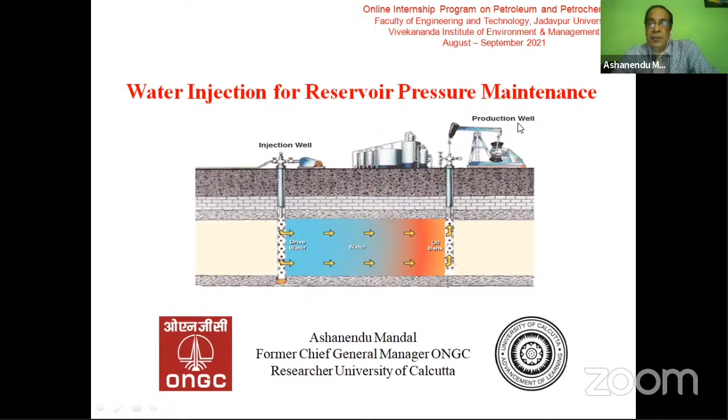On Friday, we discussed basically two aspects: oil and gas basics, meaning how we can find oil and gas under the earth and how we produce them. We had also concentrated on deep water. Now today, what we have learned is this part, the right side part: this is the well, this is the bottom, and this is the production coming from the rock, and this is coming out. This part we have learned. Now we will be learning this part, and the total explanation will happen.

First we'll introduce the topic, then we'll clarify why the pressure falls in a reservoir, and if it falls, what are the impacts, what problems we face, and then is it really required to do pressure maintenance. If it is, then how to achieve pressure maintenance, and whether only water can be used or some other things also can be injected. We'll emphasize on why water, as in our topic, and have a detailed description of water injection. As a case study we'll talk about offshore water injection, and finally conclude.

The water injection method used in oil production is where water is injected back into the reservoir to increase the formation pressure and stimulate production. Along with the production we get water, but we'll have to put that water back into the reservoir, where gas, oil and water remains, so that it stimulates the production and increases the pressure.

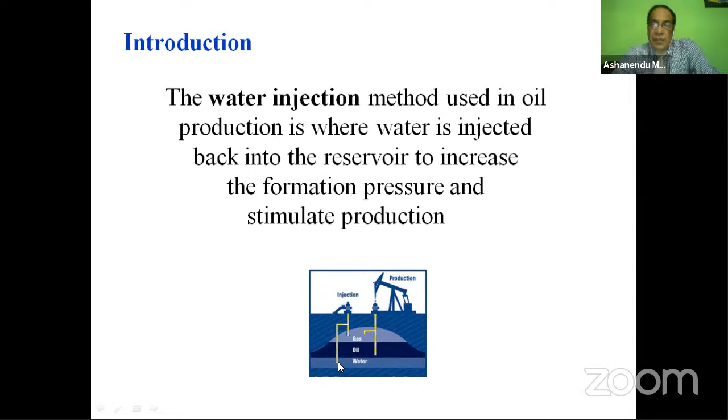Why does the pressure fall actually? It falls because the reservoir is covered by cap rock, which is impermeable rock, meaning nothing can go out of this. Whatever is there inside this formation cannot go out. So if that cap rock contains this much oil, this much gas, this much water, and some quantity is taken through the well, the availability of that quantity gets reduced. Obviously, the pressure will then go down.

The petroleum reservoir, or oil and gas reservoir, is a subsurface pool of hydrocarbons contained in a porous and fractured rock formation, and reservoir pressure falls due to withdrawal of fluid and creation of void space. So as voidage gets created, that's why the pressure falls.

Now what happens if the pressure falls? First of all, the driving force will go down. In this production scenario, production comes to the top because of the pressure gradient - this is the formation pressure and this is the well's hydrostatic head. As the hydrostatic head pressure is less than the formation pressure, it comes inside. So now the driving force will go down, and obviously if the driving force goes down, the production will go down. Oil production decreases with time because of more and more production coming out from the same reservoir.

And when this happens, the liquid which contains the gas absorbed in it gets dissociated or evolved out. So the gas quantum will go up - this is called GOR, gas oil ratio. So gas quantum increases while oil production goes down from any reservoir with time.

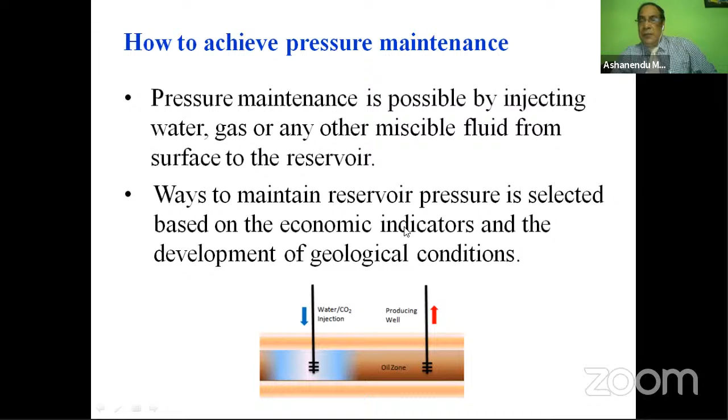Why water for injection? Because it is cheapest, that we can understand. Even CO2 is maybe freely available from flue gas, but to get it transported to the locations and other processing requirement for making it 99% CO2 or so, that will definitely be a costly scenario. So abundance, of course, water is very much available everywhere.

Coexistence with crude oil in reservoir is another important part technically, because any oil well contains some water. So if this water gets mixed with that, it automatically gets compatible. That way it has the good property to take care of the displacement of oil, and it's largely compatible. Less treatment is required to make it compatible and injectionable.

We'll definitely discuss the treatment facility and steps to be followed. We'll find that treatment procedures are very simple, not complicated, and have less problem in disposal while returning from the reservoir. If that water comes back along with production, we can easily dispose of it, either by re-injecting into the well, or after treatment disposing it on the surface. Water has a tendency to enter even the smallest pore of the rock, and hence is very effective to displace oil from there. This is another technical benefit of water.

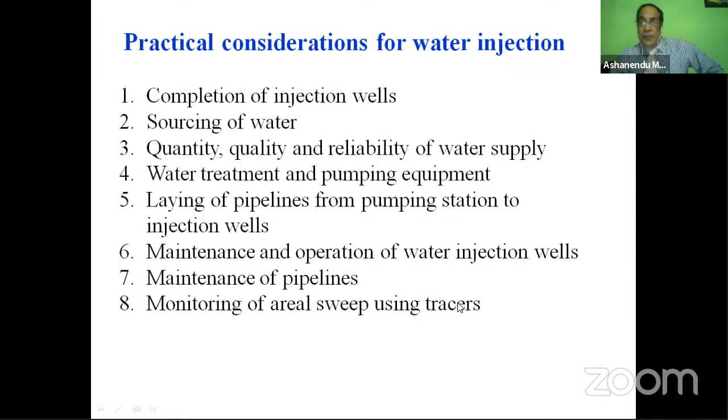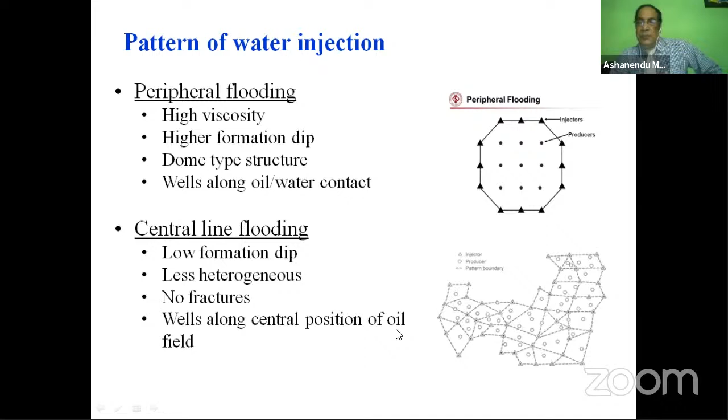Now, in case of pattern flooding, again there are few types. One is called line pattern, meaning the injection wells and producer wells are in the same single line. Otherwise there is 5-spot pattern, 7-spot pattern, 9-spot pattern, and 4-spot pattern.

So practically, what we find in the reservoir after drilling is that there is a well which is an oil producer, and there are many water injection wells surrounding that oil well. In that way, the movement of oil and water will take place at the bottom.

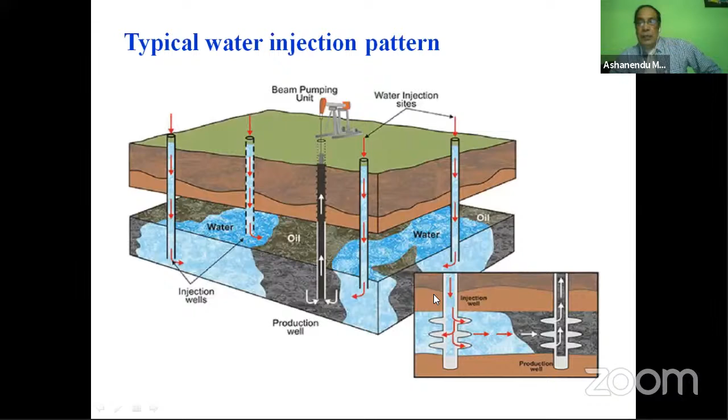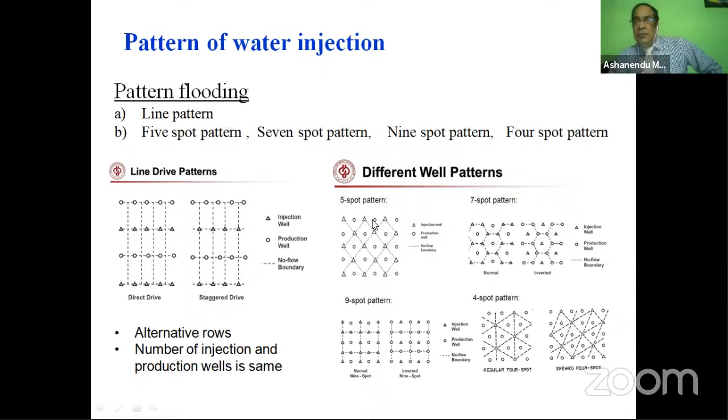And what is the ratio of injection to production wells in case of each sort of pattern? For line pattern, it is 1:1. For 5-spot, it is also 1:1. Although I said 1 is surrounded by 4 in the 5-spot, if you take a bigger area considering overlapping combinations, you will find that the number of injection wells and number of oil production wells are the same, that is 1:1. In the same fashion, the ratio for 7-spot is 2:1, 9-spot is 3:1, and 4-spot is 2:1.

This pattern matters because if we start water injection very late, meaning after removal of a lot of oil, water and gas from the oil well, there is more voidage already created, so we will need a higher injection rate at that time. So then we will have to go for 7-spot or 9-spot, because that will allow more water injection compared to the oil production.

And they are all internal characteristics basically. The flooding pattern influences areal sweep - areal meaning horizontal and vertical, area-wise you can say - that is the sweeping efficiency. Sweeping means just to push the oil by water, considering mobility ratio, that oil also moves and water also moves, their mobility ratio and pressure distribution.

These things happen because of these combinations, and ultimately it will give the benefit or it will have bad impacts also. In other words, the desired oil production rate, proper water injection, maximization of oil recovery, and taking advantage of known reservoir heterogeneity - all those things basically. There are many criteria, but we will not go into details.

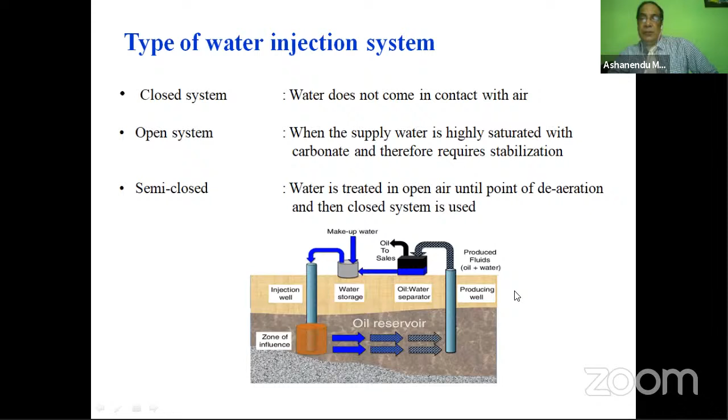As I said, this injection water needs treatment because it should avoid plugging, meaning the choke should not be plugged. It should avoid corrosion of the pipings, because if the pipings are corroded, then rust and other materials will also choke the bottom side, other than causing leakage from the tubing. And it should avoid swelling of clays, meaning clay swelling should not happen. These are the processes which happen in the reservoir, so we will have to treat the water before injection to take care of these aspects.

And plugging, in case it happens, suppose this is the plugging if it happens. So what is happening? The passage is choked. So that's why we will have to avoid it. And who causes plugging? Suspended solids, as I said, corrosion and bacteria, precipitation due to incompatibility of waters, or even from scaling materials.

This is the corrosion. You see the pipeline inside can be corroded in case the water has CO2, H2S, or dissolved oxygen also. So these are the things we need to remove before the water is put into the system.

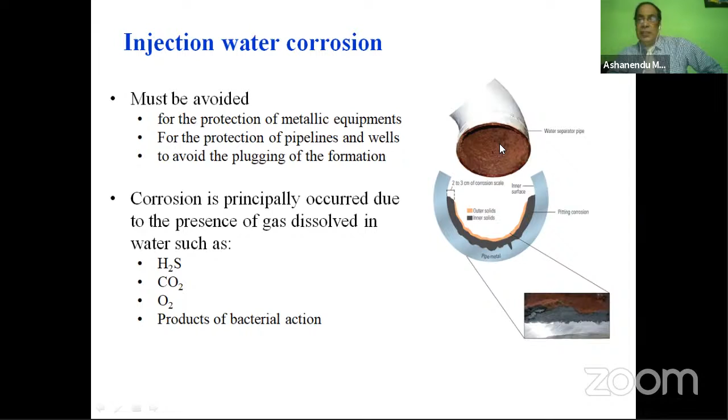Otherwise, these corrosions can take place, and finally they can also choke the pores. And swelling of clays, as we explained, in case that fresh water or water which is conducive for creating the swelling of the clay or the clay materials, that needs to be treated. Because swelling results in reduction of rock permeability, because if it swelled, then definitely the permeability will get reduced. So the best treatment for this is injection of HCl into formation for several hours before the start of water injection.

In case we find that this fresh water is conducive for swelling, then what we should do? We should put some HCl, hydrochloric acid, and close the well for some days. Then they will be seasoned up, so that any fresh water which otherwise could have created the swelling, that will not happen.

So as we have to take care of these aspects, what are the intentions of the processing? One is called sedimentation, meaning to settle out the sediments, whatever suspended solids are there, that needs to be sedimented and then filtered out. Then remove the dissolved gases, the gases which will create problems from the corrosion point of view, they should be removed.

And we should do the chemical treatment also, for scaling, for swelling and other things. So we will be using HCl, and at the same time we will use some specialized chemicals which will take care of the impact of bacteria growth, the impact of corrosion, and the impact of scaling. So we'll have the chemical treatment also.

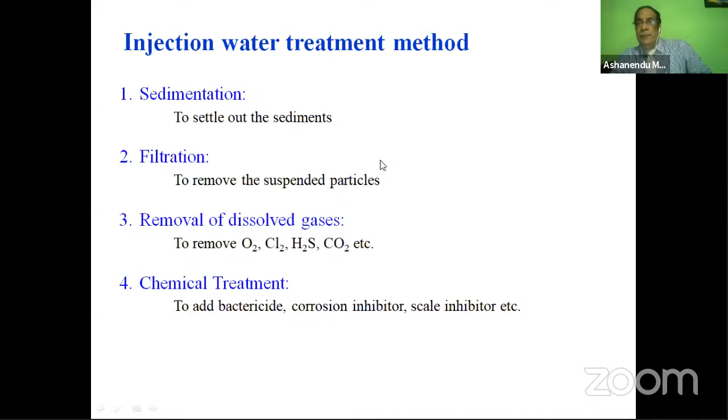So we'll have to calculate that voidage quantum, and accordingly estimate the quantity of water. Care must be taken to prevent loss of water due to failure of cement bonding. So in any well, there is cement bonding on the external surface of the tubing, to provide rigidity of the piping. There is a possibility that water can go through that leakage of the cement, that cementing failure. So that is also to be seen. The cement bonding failure, whether it can create loss of water, is also to be understood for estimating the water quantity.

Water requirement is also influenced by rate of injectivity, that is change in injection pattern. As we said, there are injection patterns which we have to identify in the beginning itself. Now if we would like to change the pattern, the well depth, the time gap and all those things, they are also equally important for calculating the injection water. So injection water quantity, although known in the beginning itself, needs to be re-evaluated or re-estimated from time to time.

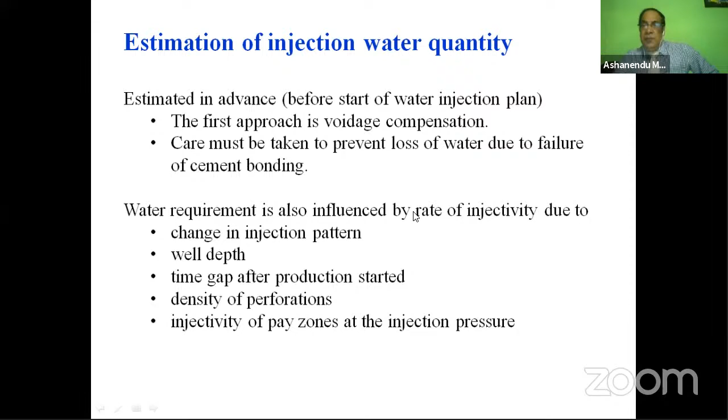And once we have understood how much quantity of water is to be injected, we'll have to go for drilling of a new well, which will be known as the water injection well. The water injection well and oil production well procedure is exactly the same. It's not that different procedures are there. All the casings, the annulus, the tubings, everything is similar, and even the perforation also is similar.

Only the layer will be a little different for perforation and for production. The production will be from the oil and water interface, but the water injection will be exclusively in the water layer. So it is a little further deeper than the oil well in that particular field. It's not that everywhere the depth is changing in the same way, but for this field where the oil well is, we will have to consider around 2 to 3 meters below that oil zone for this perforation to be done.

The new initial completion will happen through drilling of a new water injection well and conversion of an existing well. Sometimes the production well which is not producing much, because the quantum has reduced to very little quantity, can be converted into a water injection well. As everything is similar, there won't be any problem getting it converted.

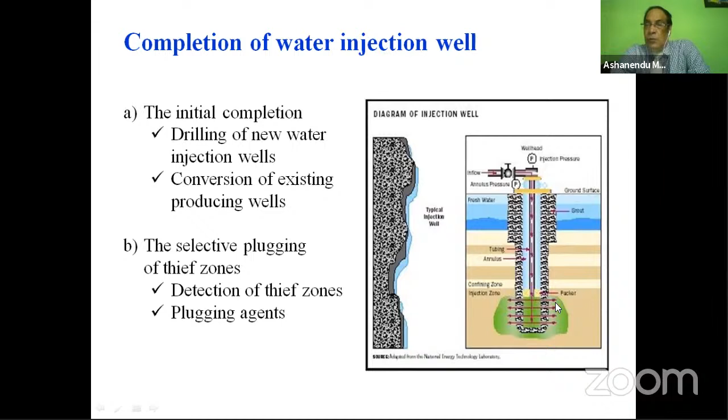We can plug them also. If we can detect them, then we'll be able to put some fluids or muds that can ultimately close or plug those thief zones.

In case we go for a new water injection well, it is exactly similar, as I said. It will not be required to convert any producing oil well. It will be drilled newly from top to bottom.

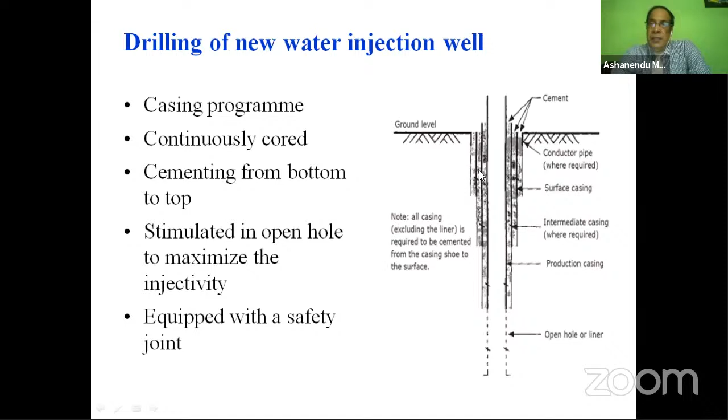This is what is happening, as I explained, regarding how the perforation and other things will be taken care of. In case the tubing which was initially lowered for oil production is now utilized for water injection, we may have to change the tubing. In case the same tubing is okay for water injection also, then it is not required.

Otherwise, this is called pulling out of production completion, meaning whatever production pipings are there will be pulled out, and then running in of new water injection equipment, with other things more or less similar to earlier.

This is the detection of thief zones. As we are saying, thief zones may happen inside the formation as a failure. There are some equipment or instruments available to identify the thief zone.

One is called continuous flow meter, meaning if we follow the quantum and find sudden ingress or outgress, we can understand there are certain thief zones. But if it goes smoothly at the same rate, then it will not be there. So continuous flow meter will be used for logging the thief zone.

Otherwise, some tracer can also be put. We can put a tracer, and in case that tracer does not come back, that means there are thief zones. But in case it comes back, then thief zones are not there.

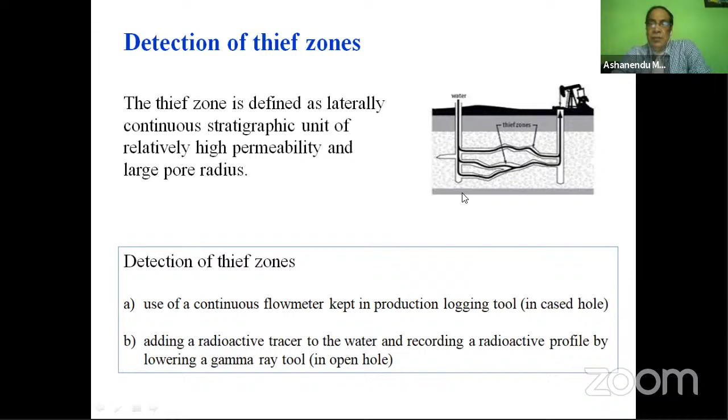For plugging of thief zones, what we use basically: talc, zinc oxide, cement, colloid, resin. These are the materials which can be used for plugging the thief zones.

Agents are injected in the form of particles. Particles travel until trapped in front of the pore. The following particles will then back up behind it, and the formation will become plugged. The effect can be accentuated if a swelling material is used.

In case unplugging is required, the precipitates may be dissolved by HCl. So these materials are utilized in a particular procedure, and in that way these thief zones can be blocked. In case we feel they need to be reopened, we can inject hydrochloric acid, which will melt or dissolve these materials used for plugging the thief zones.

And preparation of the injection well. In case the injection well has been drilled newly or converted from a production well, and the thief zones have also been plugged, now...

What we do basically when we go for an injection well: sometimes we take some production from that well itself, since injection wells and production wells are exactly similar. So in the beginning, before injection, we can take some production from that injection well also.

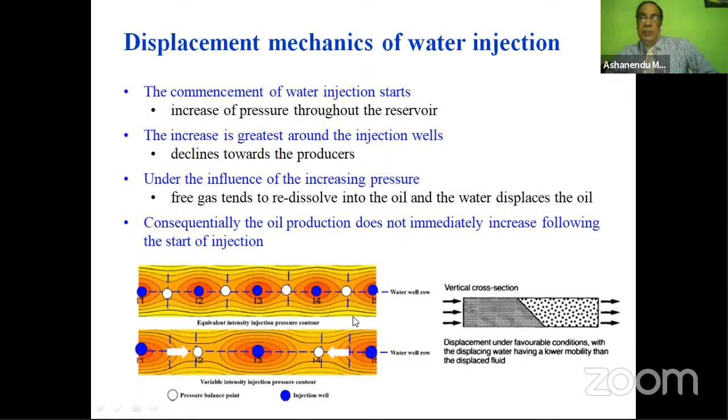Whatever is there gets displaced and comes to the producing well. So commencement of water injection starts increase of pressure. One is the pressure increase in the reservoir, second is around the injection wells, displacement also will take place. So these are the two benefits we get from water injection. These steps are all shown, but we will not go into details, just simply stepwise how these movements are taking place in the formation.

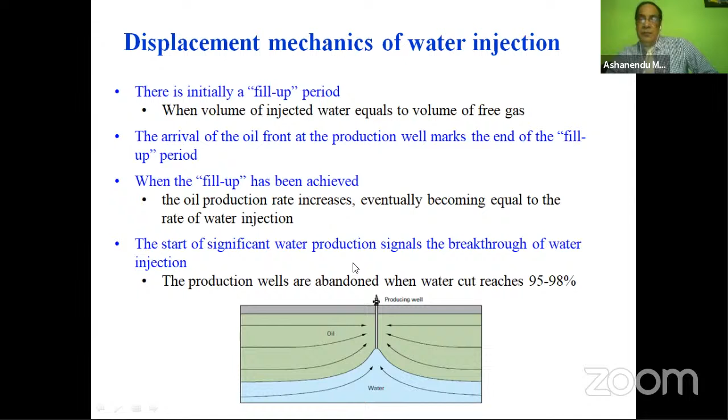Now we'll go for a case study, basically a case study for offshore water injection. In case we go for water injection offshore, definitely the source of water will be seawater. We can take water which is coming along with the wells also, but they need to be collected from a single location, because in offshore, as we explained earlier, the oil processing platform does not have big vessels to store either oil or water, etc. They are small in size and taking place continuously. But if we have to go for water injection, we'll have to collect them at gathering locations, and that is not possible. So that's why we prefer to use seawater.

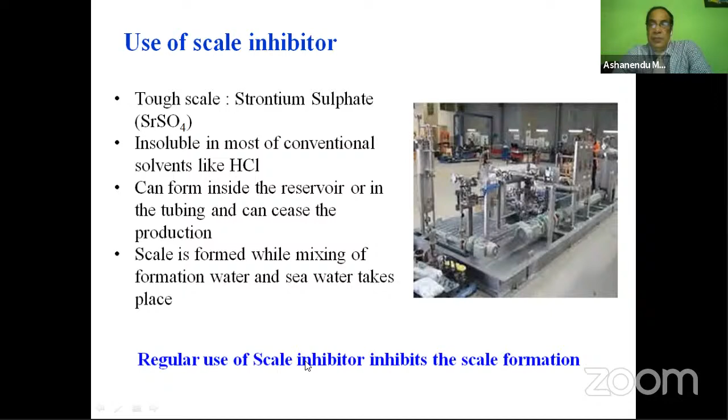Then drag reducing agent. The water has to move inside the formation very easily. There should not be drag force which creates a problem for water to flow inside. So we should use some chemical to reduce the drag - surfactant or soap type solutions can be utilized, which are effective for reducing the drag force. Use of drag reducing agent increases the pumping rate. As the drag force is reduced, we get more pumping, and if more pumping is there, fewer injections will be needed, energy consumption will be less, and corrosion chances also will be less. So there are many benefits from using drag reducing agents.

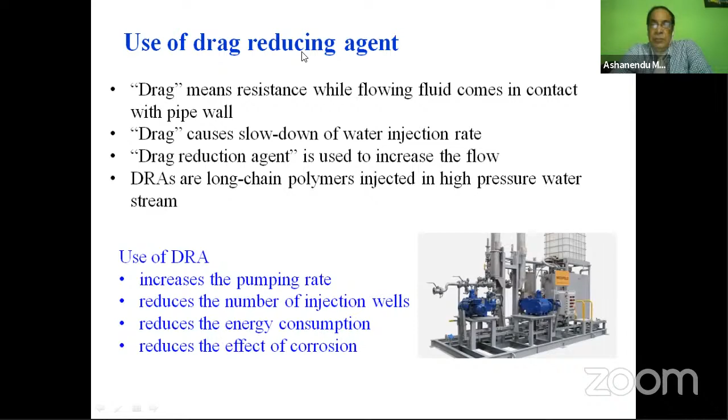We need to monitor corrosion also before going for corrosion prevention through corrosion inhibitors. One is iron count monitoring, where spectrophotometric and direct reading can be utilized. Weight loss coupon - we use metallic coupons and take the erosion or reduced coupon weight, and the loss of weight signals corrosion taking place. Or corrosion probes - directly we can use probes, and through instrument you can measure in mils per year, that is millinch per annum. This is the admissible rate, and it has to be less than that. Regular dosing of corrosion inhibitor prevents corrosion formation.

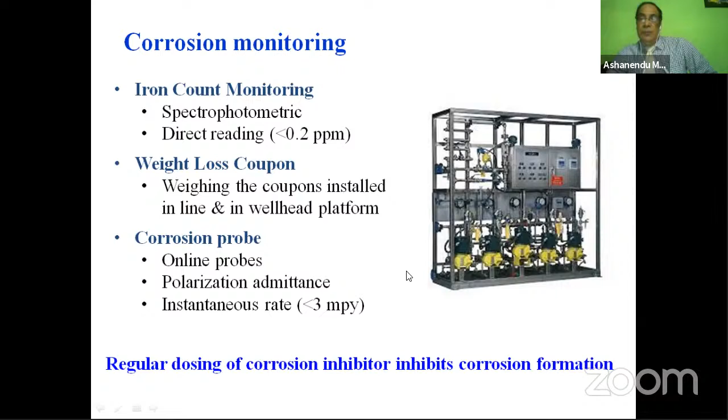And then finally we should go for maintenance of the water injection system. Once we have installed everything - the water injection wells, the processing of water injection - finally we need to maintain the total system. What are the things to look into? Water quality control physically, chemically, and biologically, corrosion control, regular inspection of surface equipment, whether any pipeline leakage is there or any leakage from the flanges, whether the valves are being operated properly, and in case of real emergency, whether the valves can rotate freely or not.

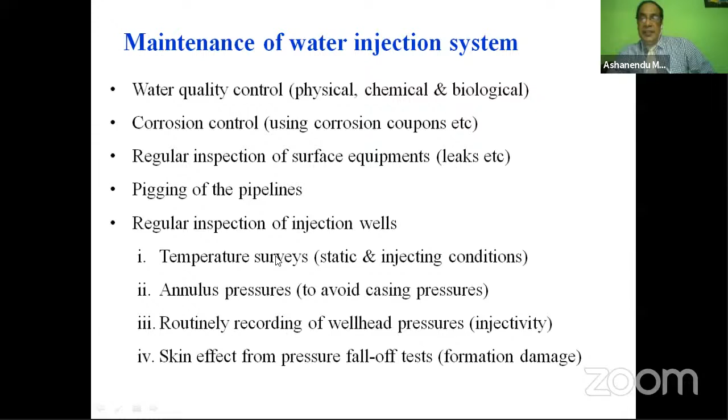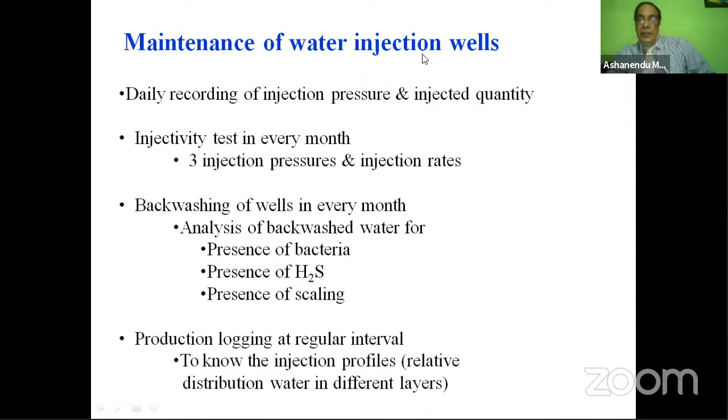Daily recording of injection pressure and injected quantity, injectivity test every month, backwashing, and production logging. So these things need to be monitored from time to time.

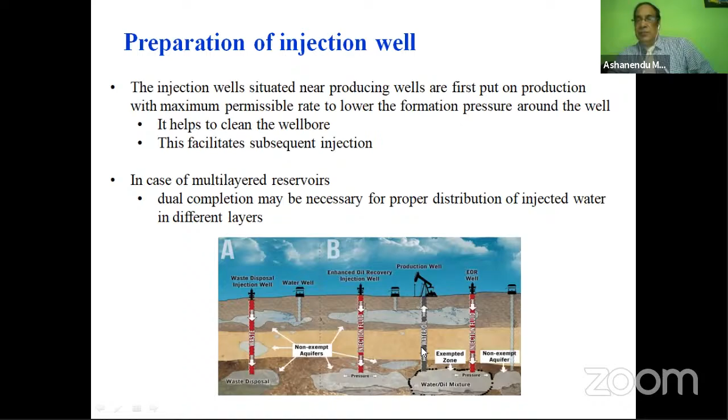So if we put the tracer and get it from here, that means no more water injection is required, because whatever water is put will straight away come from this well. So if the tracer comes, we get the signal that water injection is not to be continued.

So this tracer is for knowing the sweeping efficiency, to detect the breakthrough of water from the injection well. The tracer materials are formaldehyde, thiocyanate, nitrates, dichromate, iodides, etc. Dosing is at 1000 ppm and duration is around 2 days.

Tracers are used to track the frontal advance of water. Tracer arrival times from injection wells to producer wells help determine the sweeping efficiency. So if they come very quickly, that means water breakthrough has happened, and we should not continue water injection from that location.

So finally, if we do not do water injection, the pressure will go down, and for primary recovery, whatever original oil in place is available in a reservoir, we can get only 15 to 30% with natural energy, without water injection. But if we go for water injection or pressure maintenance by any other means, we will be able to increase this recovery factor from 15-30% to 40-45%. So a lot of gain will be there by maintaining the pressure through water injection.

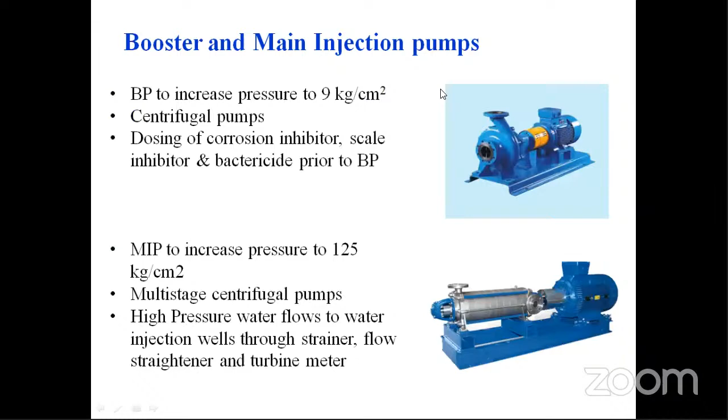And secondly, they required some modification in that also, the way we did it. What happened in the fine filtration system, for example, we found that a lot of anthracite loss is there. Anthracite is very costly, first of all, and not only from a money point of view, but to get it offshore, because offshore, as you know, there is not much space available for storing all those things.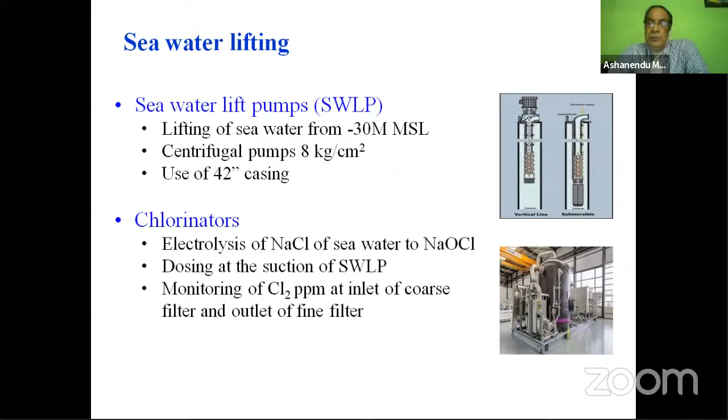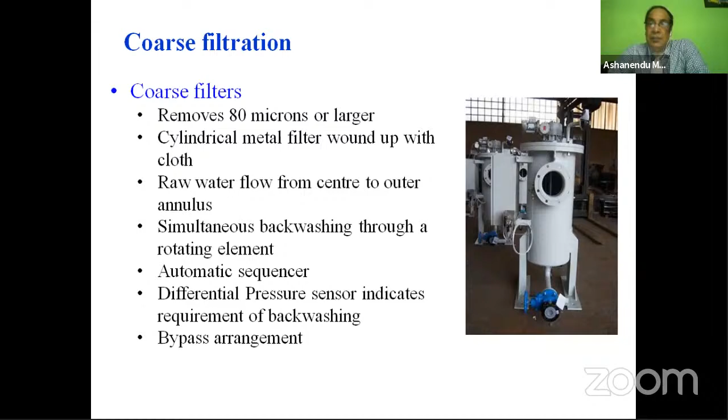So like that, there are many such instances - we are talking about a few. At every step, basically, we had to do some internal modification in operation, because in construction we cannot go for modification. In operation we can, and those things have basically influenced better results, and those are being followed now also. So this is what happens basically.

Sir, okay, I have a question apart from this. Yeah, go ahead. Sir, in offshore platforms, is there any high power eyesight cutoff to work there? No, only medical health is required. Sir, I have a high power of minus 4.5, so eyesight-wise, can I work? Yeah, eyesight so far - of course, we have a doctor on board also. He will monitor whether your movements are problematic or not. In case through lens you are able to manage like normal, then there is no objection.

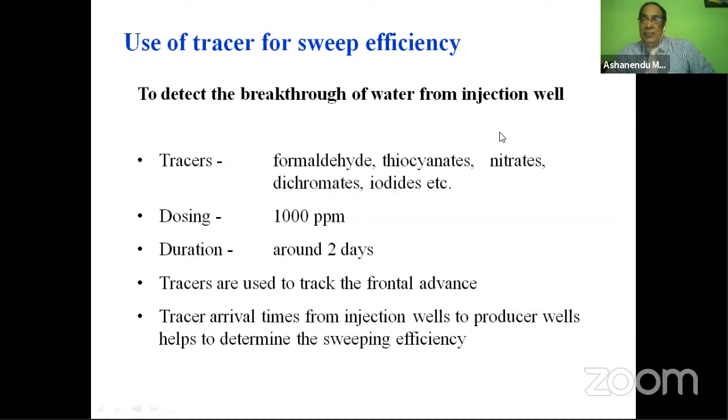I do not believe it myself. In fact, I had sought medical help to try not to continue working offshore, because I was so thin at that time, only 42 kilos, and operating with helicopters, and I was posting men at the location. So a lot of helicopter movements were there, even boat landing operations also - we had to do jumping and all those things, everything we have done actually. So I was obviously scared also. I told the doctor that this place is not suitable, but the doctor just examined me and said no, you are medically fit. So that could not be useful. So there is no problem as such, as long as you are healthy.

Okay sir, then I can work, right? Yeah, I do not find any criteria made for eyesight. Sir, usually what are the working hours for an engineer offshore? 12 hours a day. And sir, is it possible to return on the same day? No, because we have to sustain there. You will have to remain there for 14 or 21 days - in some places 21 days, in some places 28 days, but in our ONGC, it is 14 days. So you have to stay there for 14 days, with accommodation also provided.

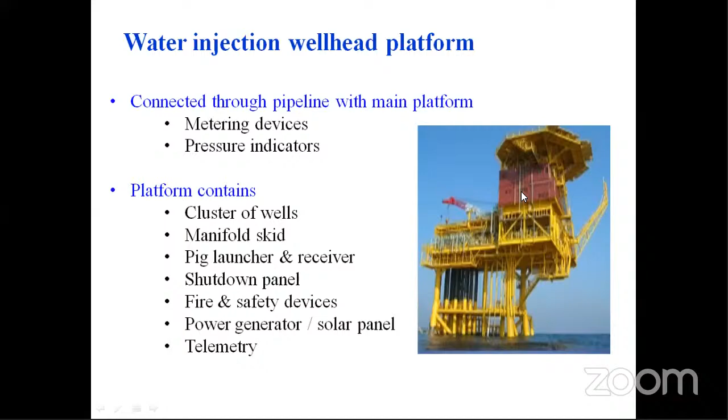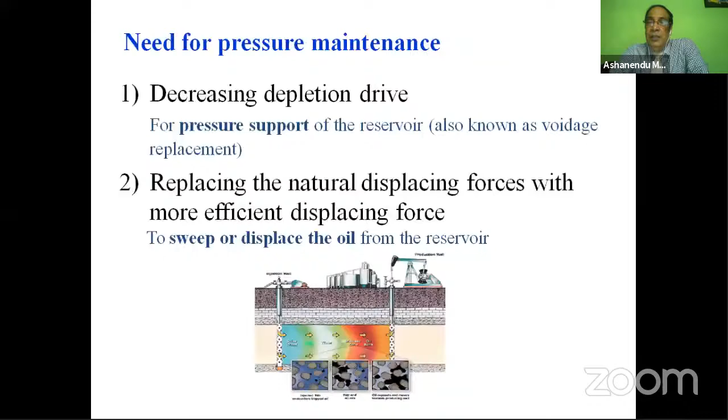Yeah, these are all accommodation. I say this is the platform. You are to remain within this area, and not you only—almost 150 to 300 people, sometimes it goes up to 300 also, depending on contract labor. Otherwise, 150 is the normal capacity, so many people are there, and bunkhouse is there. Food is free; almost a 5-star arrangement is there inside the living quarter.

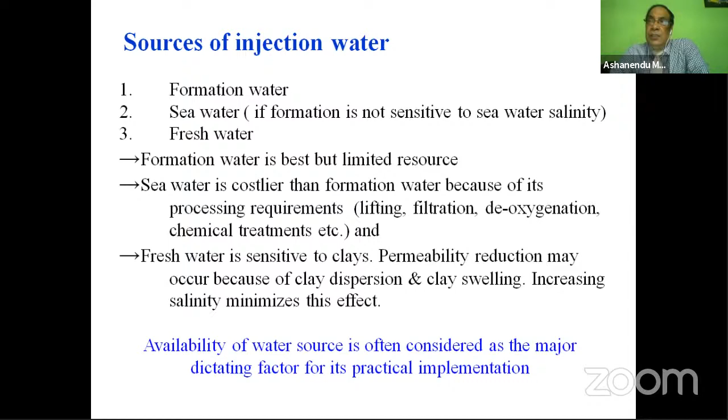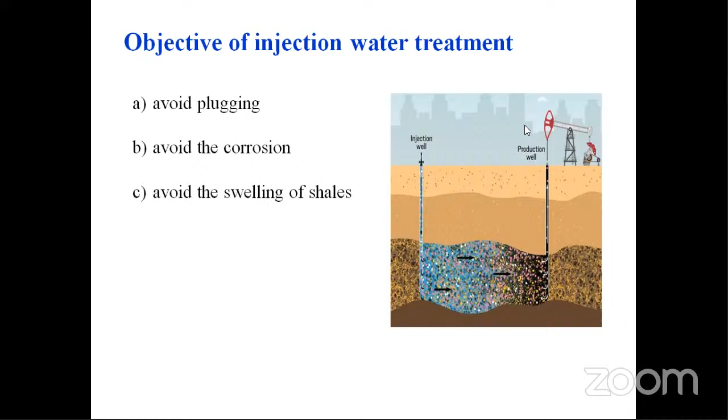So can anyone sleep without any hesitation? Can one sleep properly? Yeah, because living quarters are totally soundless. Even at your home you may get some external sound, but there you won't get anything. They are two layered actually—all the doors have two layers, and a pressurized chamber is there. The pressure inside is a little more, very less actually, but so that outside thrust of air will not come inside, or any smoke or pollution, nothing will come inside.

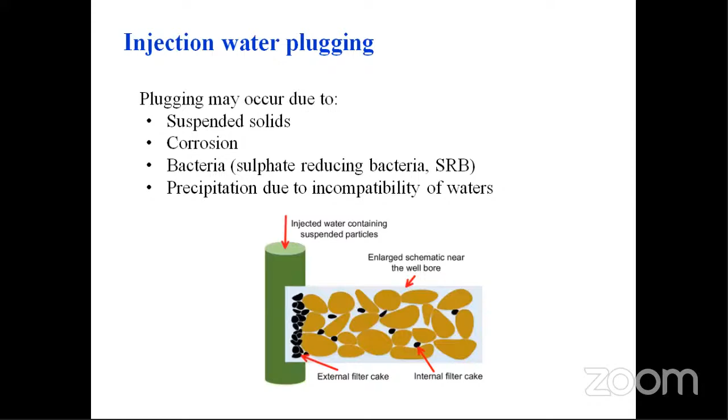And sir, if a cyclone comes—those we have already stayed there for so many years, and the platforms are there now also. That day I was explaining about deep water also, the drill ships and semi-submersible ships in the East Coast. Even the hurricane or wind speed is very high, even then, even in monsoon, people do stay there. There are very rare occasions where the places need to be evacuated. So they are all cyclone proof. There is no problem as such.

Sir, onshore or offshore, there is a constant fire, sir. What is that function, sir? Constant fire—no, that is called flare. Clear. Yeah, oh yes, flare, sir.

Actually, even in offshore we have the flare system. It is water injection, that's why the continuous flare is not there. But where the oil and gas processing is there, we have a flare, because the low pressure gas, very low pressure gas, cannot be recompressed and taken back into the mainstream. For example, suppose we have a separator which takes at 1 kg per centimeter square—that gas, if you have to compress, needs huge money to invest again. So those gases, or even wherever atmospheric stabilization is there, suppose in an open scenario the tank is being maintained, because the oil needs to be stabilized totally free from gas so that it can go to the tanker for transportation, because the tanker cannot take any gas along with the oil.

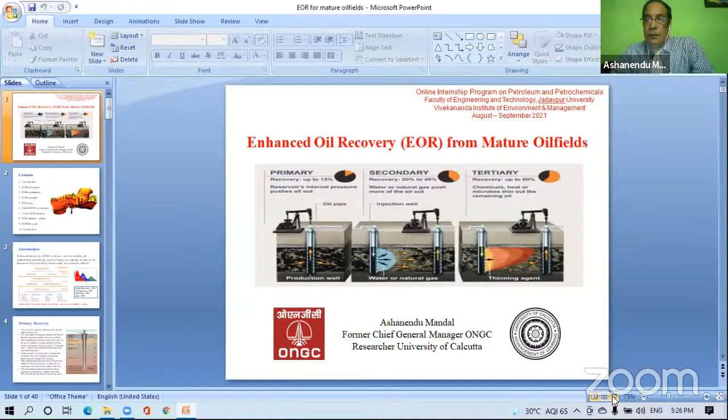Yes sir, what can you see? What is written? Sir, enhanced oil recovery from mature oil fields. And what is the meaning of that? So far, what can you understand from this?

The remains just the oil, sir, means the last portion of oil. How to extract it? In our earlier lecture we said 15 to 30% can go up to 40 to 45%, but still it is not touching 100%, because some oil is still left in the reservoir. So this is another step to go for more production from that location. That is called enhanced oil recovery from mature oil fields.

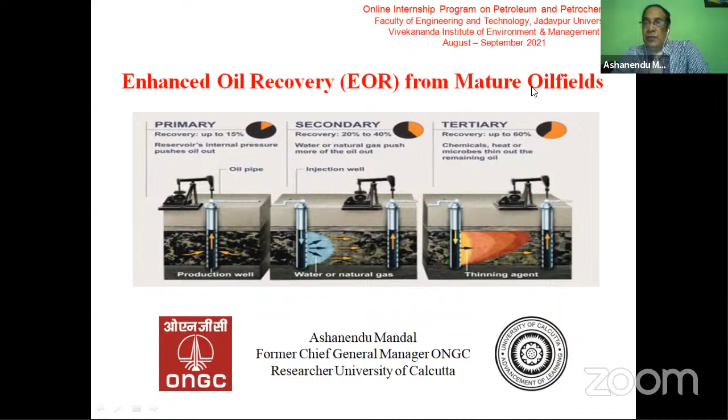So this picture is saying primary, secondary. We'll explain that, but we'll go through it very quickly now. I think many of the things are almost explained, so we'll not explain right now. When you get this presentation, you will understand them on your own also, so we need not explain in detail now.

Introduction, techniques of enhanced oil recovery, implications, principle, costs, global production, Indian scenario, selection criteria, life cycle, and conclusion. Enhanced oil recovery or tertiary recovery includes all methods that use an external source of energy or materials to recover oil that cannot be produced economically by conventional methods.

Whatever we have produced earlier by primary recovery used natural flow or artificial lift, such as sucker rod pump, submersible pump or gas lift, for primary recovery of production. Then we went for pressure maintenance or water flooding for secondary recovery. Now we are at tertiary recovery, and this can take the production above 50% and up to 80%, so you can estimate now up to 80% is possible to be recovered if we use this enhanced oil recovery.

World recovery average is now 22%, so the future is very bright from that perspective. USA recovery is 39% and India is 32%.

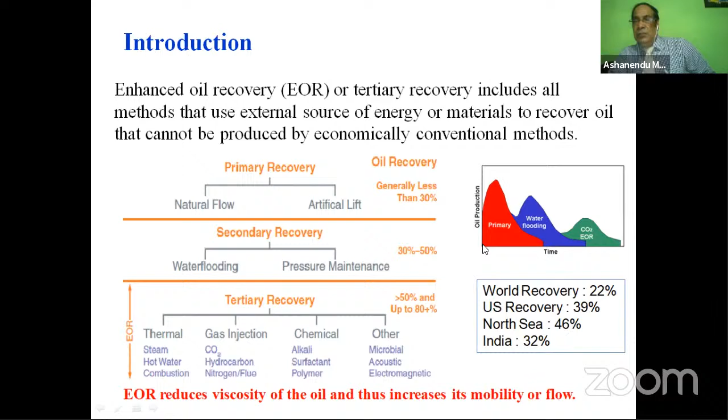In case of primary recovery, if water flooding and CO2 are not used, the production will stop here. But if we go for water flooding, then we can go up to here, and if we go for CO2, then we can go further. This way we can continuously take production for even longer time.

Primary recovery we had already explained, so we need not go into details, just we'll read it. The oil well is created by drilling a hole into the earth with an oil rig. Few steel pipe casings are placed in the hole to provide structural integrity in the new wellbore. Holes are then made in the base so that the oil is connected with the reservoir through the wellbore. Finally, a collection of valves called a Christmas tree is fitted to the top.

After that, there is a processing facility. It is necessary to connect the Christmas tree with the pipeline network for processing. If the underground pressure in the oil reservoir is sufficient, the pressure will force the oil to come to the surface. In case the pressure goes down, then we'll have to go for SRP, ESP or gas lift.

So when we go for this artificial lift, we are not doing anything in the reservoir. Whatever we are doing is up to the wellbore only. We have not done anything in the reservoir in case of primary recovery.

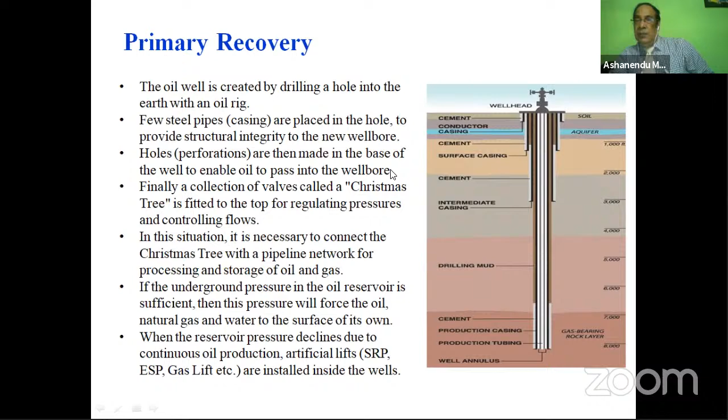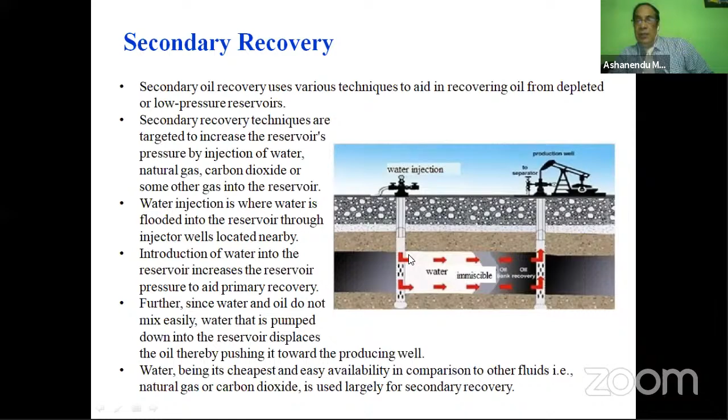Now we go for secondary recovery, which we are doing through water injection, as we explained. So here we have done something in the reservoir — we have increased the pressure. So we need to explain this now.

Tertiary recovery involves injection of different materials into mature oil fields or mature reservoirs to recover oil remaining after the primary and secondary recovery phases. The process of EOR can be classified into four major groups: thermal, chemical, miscible gas, and others like microbial. Try to remember these things — not essential right now, but at least by listening.

Thermal EOR uses thermal energy, meaning we have to increase the temperature of the reservoir. If we increase the temperature, the viscosity will get reduced. This part is to be understood: viscosity goes down if temperature increases. And if the viscosity is less, the mobility will be better because the resistance force and drag force will go down, so more easy flow will be there.

So this topic talks about using thermal energy to increase the temperature, and that can be done by cyclic steam injection (huff and puff method), continuous steam injection, hot water injection, steam assisted gravity drainage system, and in situ combustion or fire flooding. We will explain these 5.

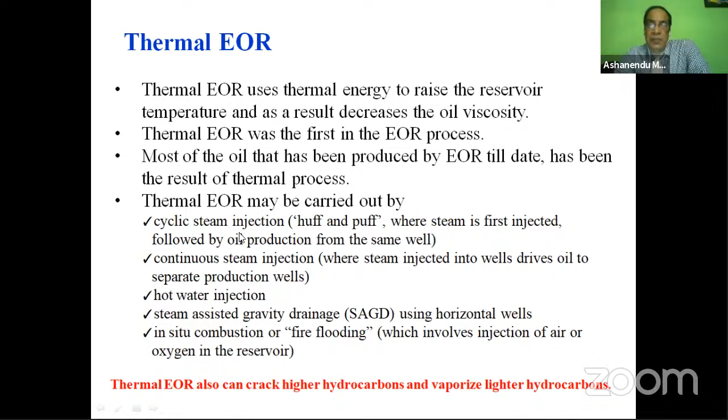This is called cyclic steam injection, also known as huff and puff, because the same well can be utilized for injection as well as production. Only when injection is happening there won't be production, and when production is happening there won't be injection. So a single well, when it can be utilized for both operations time to time, is known as cyclic steam injection.

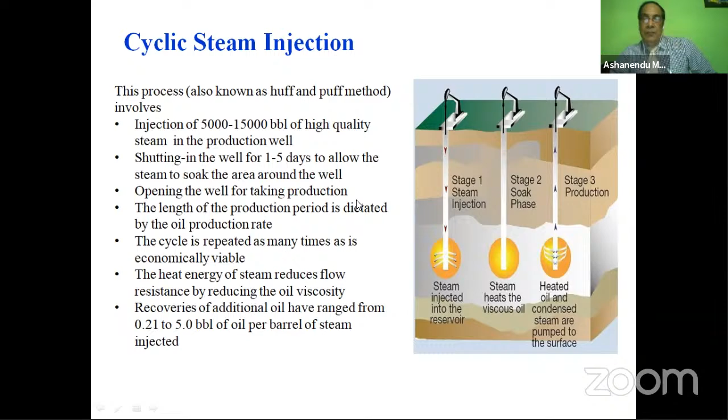Continuous steam injection is different. Here we have to continuously inject steam from a distant location, like water injection, but here we are injecting steam. If we inject steam, that steam will flow from the perforation like this, and this will increase the temperature. As we explained, the viscosity will go down and the formation will be easier for oil movement, so oil can come there.

This process is known as the steam drive method: injection of steam in several injection wells while oil is produced from other wells. Some thermal energy is lost through the reservoir, especially in deeper wells, meaning there is a loss of some temperature because of more depth. Those things are to be remembered.

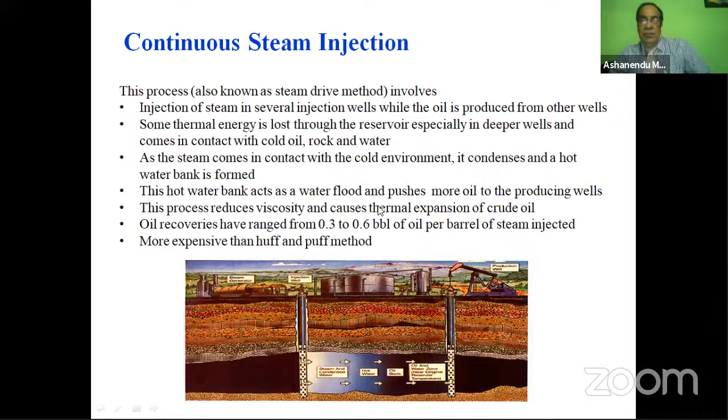There are some more explanations, but we will not explain in detail as it will take time.

We can go for hot water also. So first we went for steam, either huff and puff or continuous. Now we can go for hot water, meaning steam will not be injected. The water will be at high pressure, before steam formation we will inject it. Even then it will carry some temperature, and that will be used for taking more production.

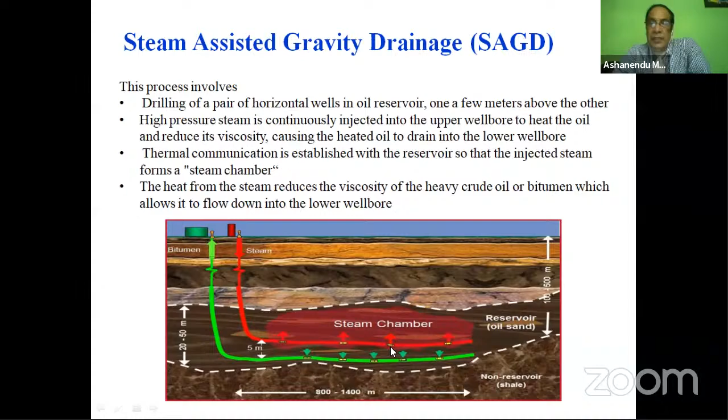Finally we can go for in situ combustion, meaning instead of using hot water or steam from the top, we can use air or oxygen from the top and fire some of the oil here itself. Some oil will be combusted in the reservoir, in the bottom, because normally although it is combustible, as there is no oxygen, no fire takes place. But if we put some controlled oxygen or air from the top, some quantum of oil can be burned there, creating heat that reduces the viscosity of the distant oil, facilitating oil production. So in situ combustion is also known as fire flooding.

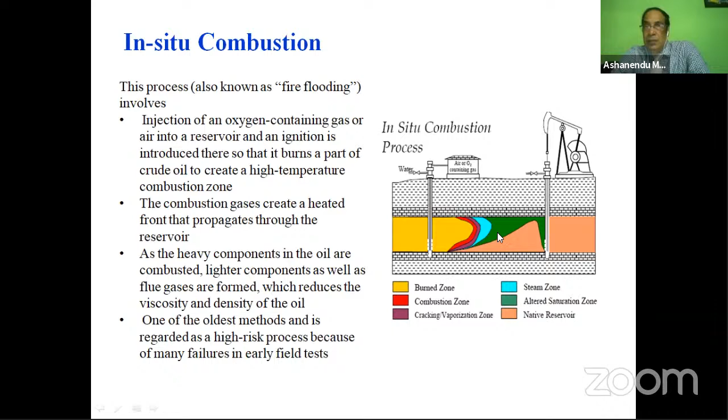So these are the 5 methodologies which can be utilized for increasing the temperature in the formation. Increased temperature will reduce the viscosity, and reduction of viscosity will increase the mobility, so more oil production can be made available. In general, heavier oil, which has got more heavier cut, will have better results for all sort of thermal EOR methods.

Okay, the next is gas injection. Instead of thermal, if we inject gas, what will happen? Gas injection EOR involves injection of gaseous fluids in the reservoir to enhance pressure within the formation. First of all, it will increase the pressure, as we have already explained for water injection.

Secondly, gas injection sweeps the formation for remaining fluids. It will have, like water, very good sweeping efficiency, so that will boost the oil production. Gas injection is always carried out through separate wells, so that the remaining oil can continue production. Means the same oil well cannot be utilized for gas injection. Earlier we showed that the huff and puff steam injection method can utilize the same well for additional production, but here we will have to have a separate gas injection well.

Gas injection EOR may be carried out by natural gas or any other hydrocarbon, maybe it's LPG, nitrogen also, carbon dioxide also, flue gas also. So the answer we will be getting right now after 2-3 slides, what sort of benefit we can get by carbon dioxide injection to reduce the pollution of environment.

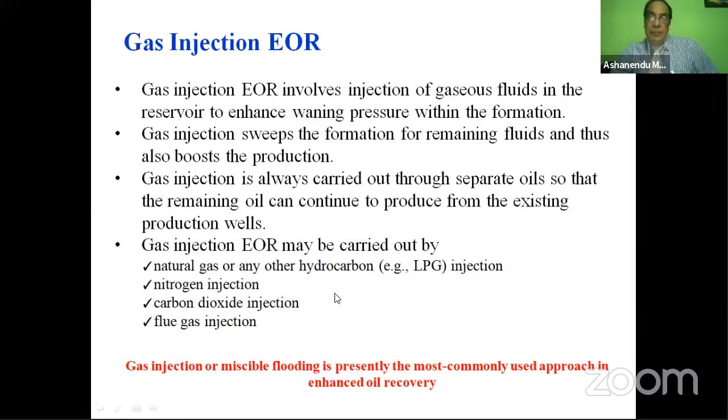And in that way, this gas which will remain in the reservoir for some time till the consumer is tied up, that gas is not being flared. So it will be really good that no hydrocarbon is being lost from the reservoir.

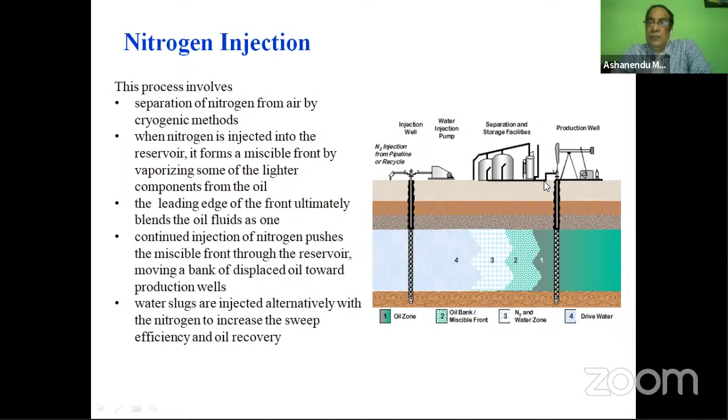Okay, nitrogen, similarly, like other gases, we can use nitrogen. From air, we will take the nitrogen. And as we are using nitrogen without oxygen, definitely no fire will happen. Nitrogen is utilized as a gaseous fluid only to displace the oil and take more production from the reservoir. So in this case also you need a separate well.

Then CO2 or flue gas injection. Suppose if you have got a CO2 source, for example a thermal power plant, or even a refinery, or a steel plant, wherever you find that CO2 is being generated and, along with the flue gas, being vented, that gas can be captured and put into the formation. And if we put it into the formation, then definitely we can expect the viscosity to go down, and displacement also will take place, and more pressure also will be generated, so more production can be made available.

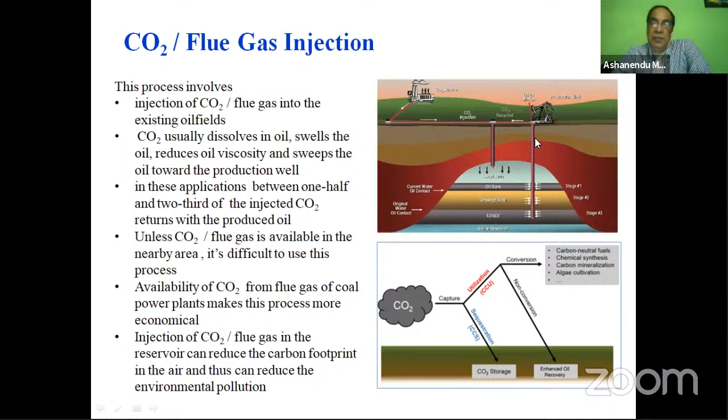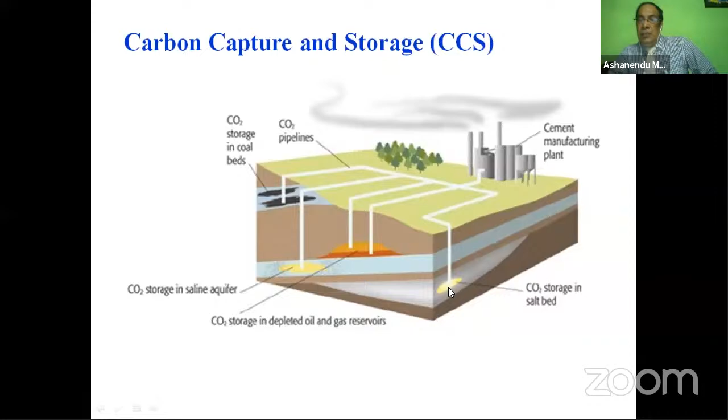Then third is the chemical EOR. The gas is over, the thermal is over, now we can go for chemical. The injection of various chemicals can aid oil mobility through reduction of surface tension and oil viscosity. Earlier, the first one, thermal, mainly affects viscosity. The second one, gas, gives viscosity reduction, sweeping, as well as pressure. The third one, chemical, does not increase reservoir pressure, but it will reduce surface tension and oil viscosity.

Because this is like a soap solution basically, if we use that, the surface tension will go down and ultimately the resistance will go down, the mobility will increase. Chemical EOR can be done by alkali injection, surfactant injection, polymer injection, and a combination of all three, any two or three, whatever way. Individually also it can work, but if you do a combination, you get the maximum and best result.

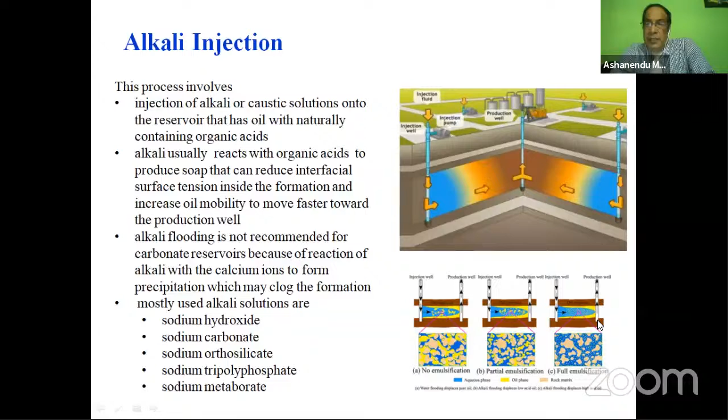Surfactant: this process involves injection of dilute solutions of surfactants or soap. Surfactants usually lower the interfacial tension or capillary pressure. Special formulations of oil, water, and surfactant microemulsions can be particularly effective in this procedure. Surfactants are usually sensitive to high temperature and high salinity.

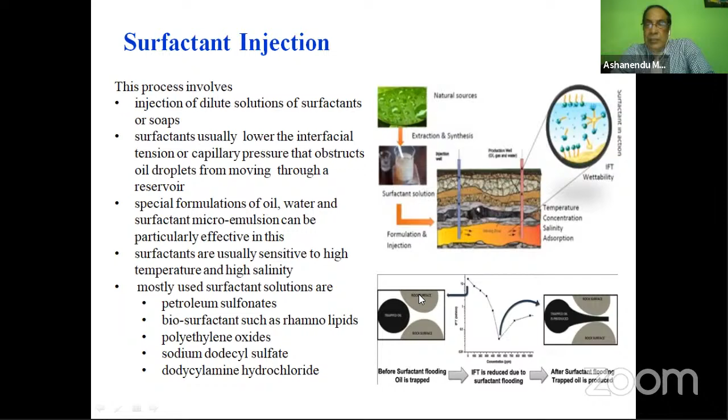Mostly used surfactant solutions are petroleum sulfonates, biosurfactants such as rhamnolipids, polyethylene oxide, sodium dodecyl sulfate, and dodecylamine hydrochloride. These are the usual surfactants utilized, and as it is a soap solution basically, it will reduce the surface tension or the interfacial tension.

Polymer injection has another benefit basically. Polymers usually increase the viscosity of the injected water. The injected water, in case it has got some polymer, then the viscosity of this water increases, so it will have easier sweeping, because as this water has additional viscosity due to polymer, that will increase the sweeping of the oil in a better way.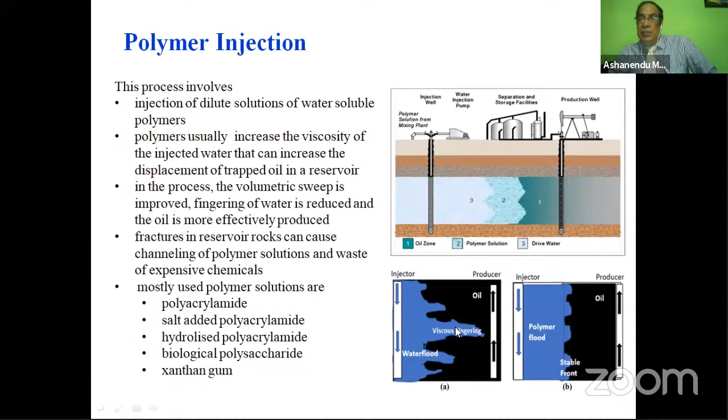So we need to monitor the reaction of polymer injection, and we should do the logging and see the results, what sort of distribution is happening in the oil movement. And then this is the combination, so this is the combination we need to explain. Okay, then this is the final procedure.

This is called microbial EOR. This process involves the injection of microorganisms and nutrients such as molasses or ammonium nitrate into an oil reservoir, and then shutting off the well for an incubation period, allowing the microorganisms to react with the oil in the reservoir to produce results. Meaning, if we put some water and nutrients like molasses and keep it in the reservoir for some time, a lot of microbial or algae formation will occur, and they will ultimately give the same benefits achieved through the other procedures like surfactant, polymers, gases, whatever benefit we got in the previous procedures, all those will be available by injecting microbial.

So microbial EOR finally results in wettability alteration, interfacial tension reduction, emulsification, viscosity reduction, reduction of mobility ratio, oil swelling, selective plugging, increased reservoir pressure due to formation of gases, and increase in permeability due to formation of acids.

Microbial methods have really big advantages, but there are limitations also, because we need to culture the microbial in laboratory for industrial purposes, and that needs a lot of time, a lot of space, and a lot of fine tuning. So although it has a lot of benefits, commercial utilization has not been extended the way it has for thermal and gas and polymer methods.

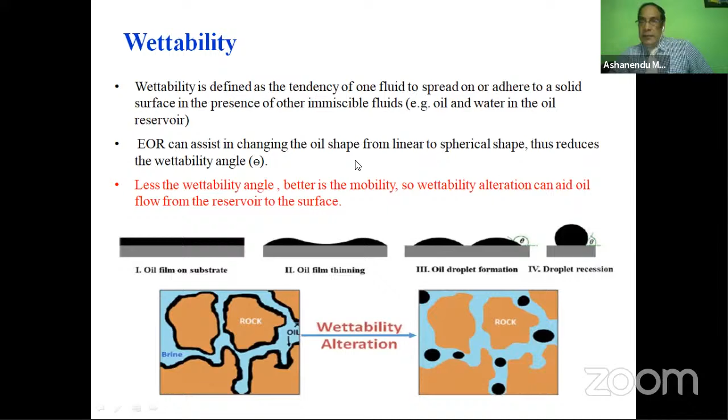No sir, mercury will be spherical, but water will be spread, right? Yes sir. So that angle, the wettability angle, shows how much area is being covered by that liquid surface. So the more the wettability, for example in case of water spread on glass, more force is required to remove this water from the glass. But if it's like mercury, small spherical droplets, even a small force can move it, right? Yes sir. So that advantage is obtained by reducing the wettability.

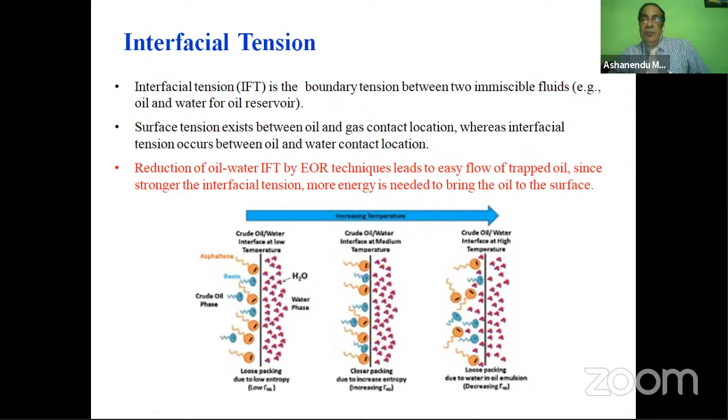So that interfacial tension will have some interaction if we use materials like microbial, chemical, whatever we put, mainly for polymer and soap solution, and microbial methods will get these results - not for thermal or gas injection as such, but these two will be able to change the interfacial tension very rapidly.

These things are simple to understand from the picture, but practically all of them are happening in the reservoir - we cannot see those actions directly. They are all laboratory tested, that's why we can explain them. But all this activity which drags the oil flow, or requires more force for oil to flow, gets reduced because of such actions.

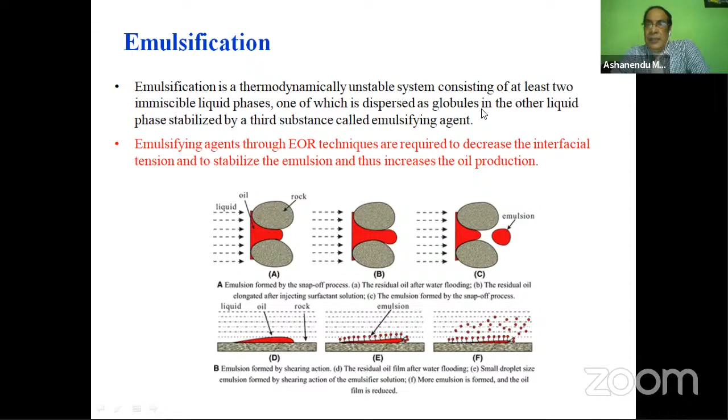The viscosity we have already explained. If the viscosity is reduced, obviously the mobility will increase and more easy flow will be there.

Oil swelling - we had explained this in the water injection case also. In case swelling occurs, the clay swelling will obstruct the pore, increasing the rock quantum and reducing the pore, and that will plug it. Here, in case oil is swelled, meaning the oil is expanded, the same problem occurs because more oil cannot easily flow. So oil swelling is also an important parameter to be measured and which is possible to achieve through this procedure.

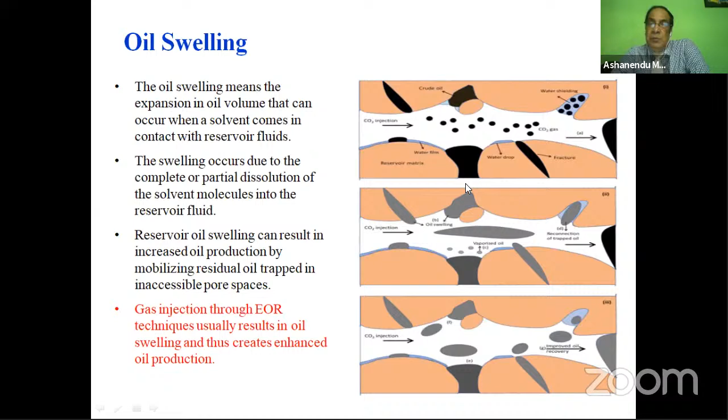Then selective plugging - we have clarified this through water injection also, how we can go for selective plugging so that wherever it is not required, we can plug them, and we can reopen them also.

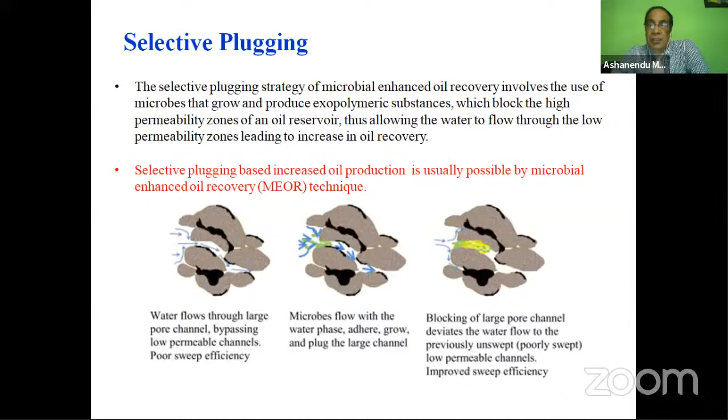It depends on the continuous monitoring of what is happening in the reservoir. In case of EOR principle, another 5 minutes only, okay.

In case of principle, basically we have got two, this is a multiplication theorem. All the procedures have a multiplication theorem, meaning either displacement or volumetric sweeping. The volumetric sweeping is areal and vertical, then the volume, and displacement is total movement. So the benefit of multiplying both will always be the maximum. This explains how we get the displacement efficiency, the areal efficiency, and the vertical efficiency. If we get all of them together, our percentage recovery efficiency will be more. This is the equation: RE equals D, A, and V.

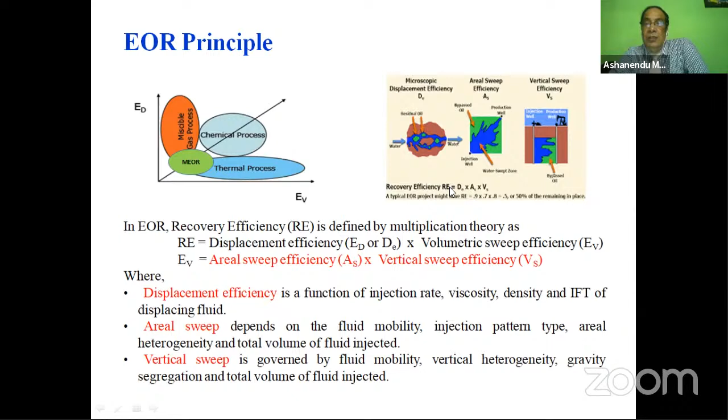Then if we utilize surfactant, the soap solution sort of thing, we have to go for more investment because they are all costly chemicals from a consumption point of view. The unit cost is not to be seen just by appearance - it has to be seen from the quantum required. As more quantum of surfactant is required, the overall cost will be very high. At the same time, we can get recovery even more than what we get from water injection or CO2. So surfactant in that way will always be better, even the best we can say. If we can invest more, we'll get more oil from that.

And microbial, as we said lastly, is not commercially that popular, although it has benefit. It can go up to 65% recovery, and cost is very less. The only thing is its availability is very limited.

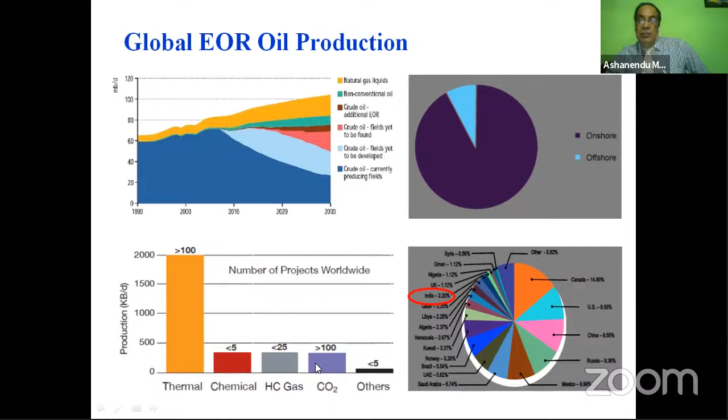This is the global EOR production. In case EOR is not there, the oil production will go down. So this is the EOR quantum which will add up production with time. In India, we have got the EOR benefit around 2.2%. Worldwide, thermal is maximum, then chemical, then hydrocarbon gas, and then CO2. This is the overall global picture.

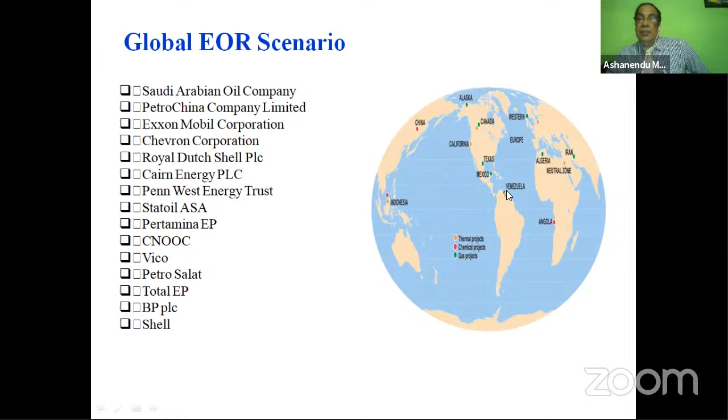These are all the companies working for EOR: Saudi Aramco, PetroChina, ExxonMobil, Chevron, Royal Dutch Shell, Cairn Energy, Penn West Energy Trust, Statoil, Pertamina, CNOOC, Vico, Petrosalat, Total EP, BP, Shell. They are all working for EOR. These are the places where we have put thermal, all those descriptions are given.

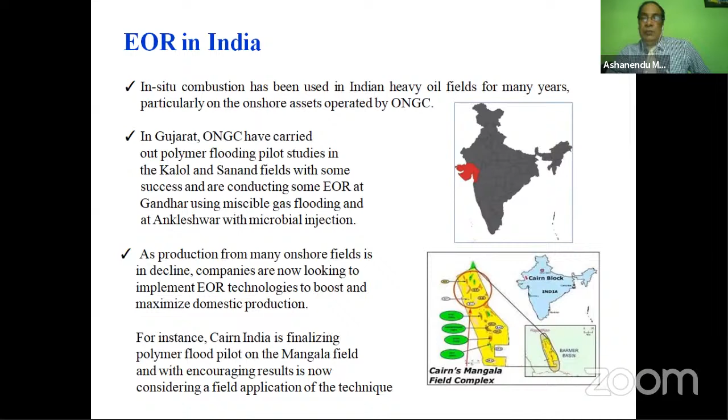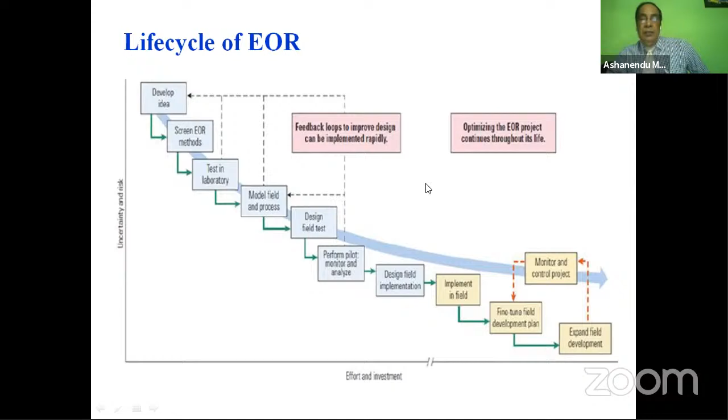To conclude, enhanced oil recovery is also known as tertiary recovery, which targets immobile oil in mature reservoirs to increase flow. EOR is usually conducted through thermal, gas injection, chemical injection, or microbial methods. The growing demand for crude oil necessitates EOR application irrespective of cost. However, the good sign is that crude price is increasing, therefore boosting EOR. As production from mature fields in India is in decline, companies are now looking to implement EOR technology to boost domestic production.

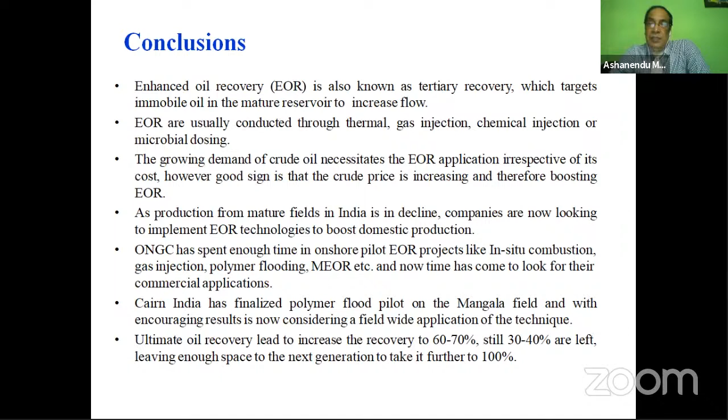ONGC has spent enough time in onshore pilot EOR. Now time has come to look for commercial applications. Cairn India has finalized polymer flood in Mangala field, and with encouraging results, they are considering a field-wide application of the technique. Ultimate oil recovery can lead to increase in recovery to 60 to 70, even 80%. Still, some percentage is left, leaving enough space for the next generation to take it further to 100%. Whatever technology has been finalized so far cannot be sufficient to take it to 100%. New generation means the new generation can still work on how the total oil in place can be extracted from any existing oil field. That's all, I have finished.

Yeah, okay, any questions quickly? You can ask.

Sir, is EOR, are all techniques necessary? EOR I think is very much cost taking, sir. Yeah, you're very correct. As we have explained, in India only 2.2% of total production comes from EOR. Whatever total EOR production has happened worldwide, India's contribution is only 2.2%. That is because EOR definitely has a lot of investment requirement. So the Middle East also was not very much thinking of taking more production through EOR. Instead, they are thinking to go for new oils to be developed. So that psychology and calculation is always there. And as oil prices are a little more now and going to be further more, this technology may become popular. Otherwise, this is not today's technology - all this technology has developed from the 1980s onwards. But commercialization is not popular because of the investment aspect, as you explained. So it's not essential whether you go for a new oil well or implement EOR in a mature field. That depends on money, and more success will finally dictate whether you should continue or not. But they are all commercially beneficial as of now, just not popularized from the investment point of view.